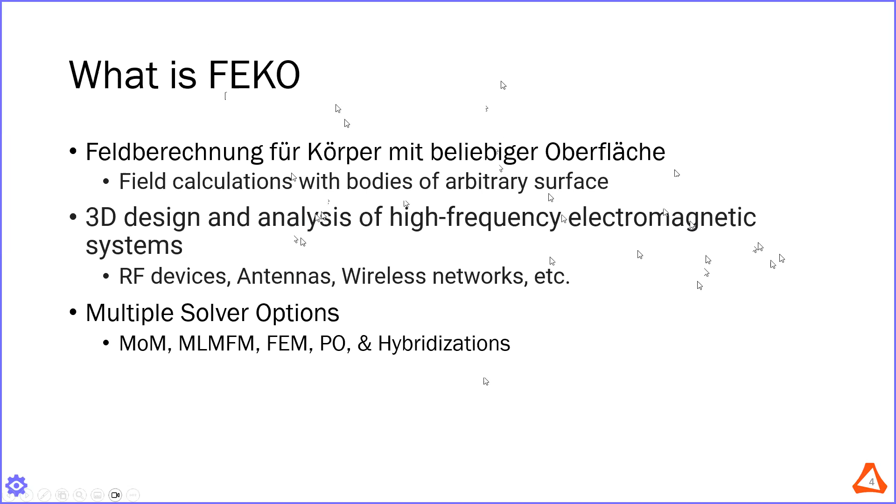So without any further ado, we'll just jump right in. First, we'll look at what the FEKO interface looks like. Just to make sure, can everyone see a new screen that is not my PowerPoint now? Yes, I can see.

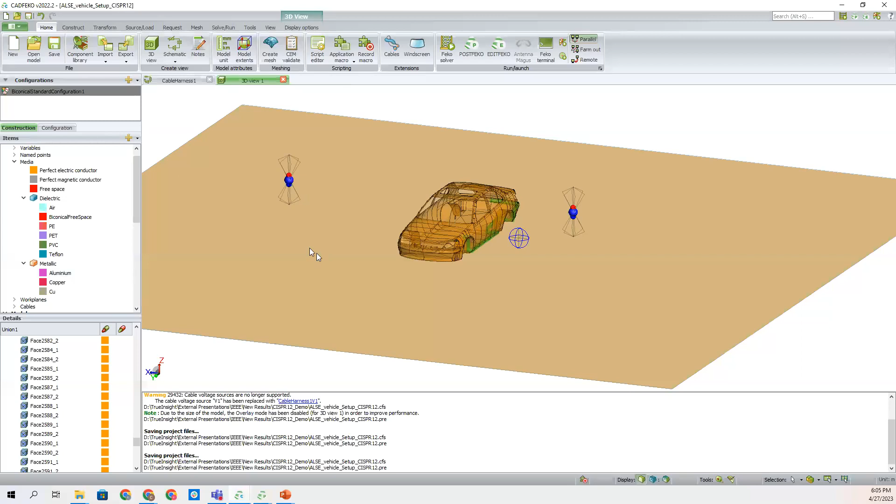Okay, perfect. So before we start even looking at the model we're using, I just wanted to go over a little bit of how FEKO's workflow looks, especially since this might be newer to some people than CISPR. I know some of you have heard of it, some might have even worked with it before, but for those coming in blind, I'll show a little bit of what it looks like.

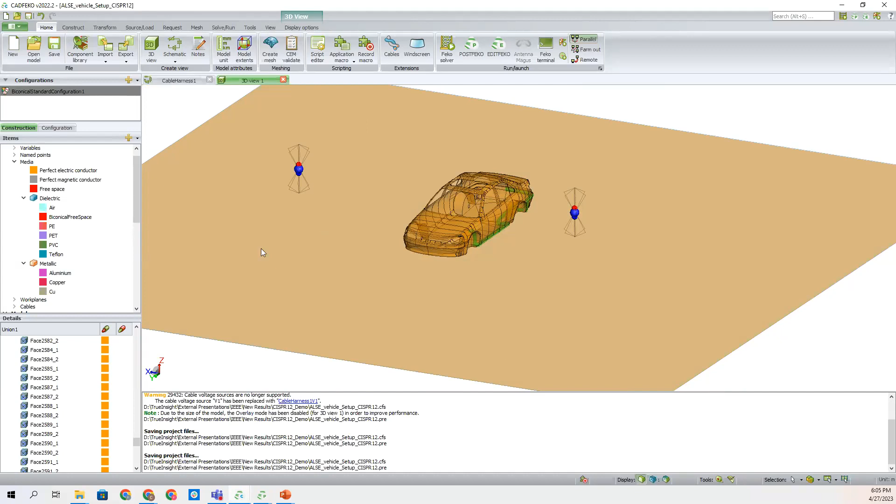So we have our workspace here where, just like any other 3D CAD program, we can zoom in and out and look at our model. That's pretty standard. But then we've got this tab at the top that helps us go through the process of designing something that we want to actually analyze within FEKO.

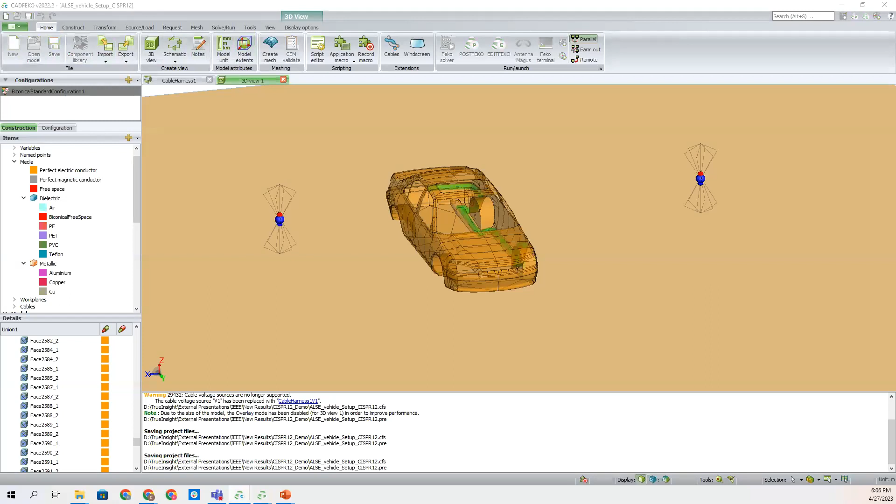So here on the Home tab, we've got some pretty standard options. I won't go over a lot of them, but one cool thing I really like is the ability to import pre-built components. You see there's a pretty extensive list of options, and that includes not only the actual electrical components you're trying to model, like a blade antenna or a biconical antenna, but also some actual structures so you can analyze how they interact in more real-world scenarios.

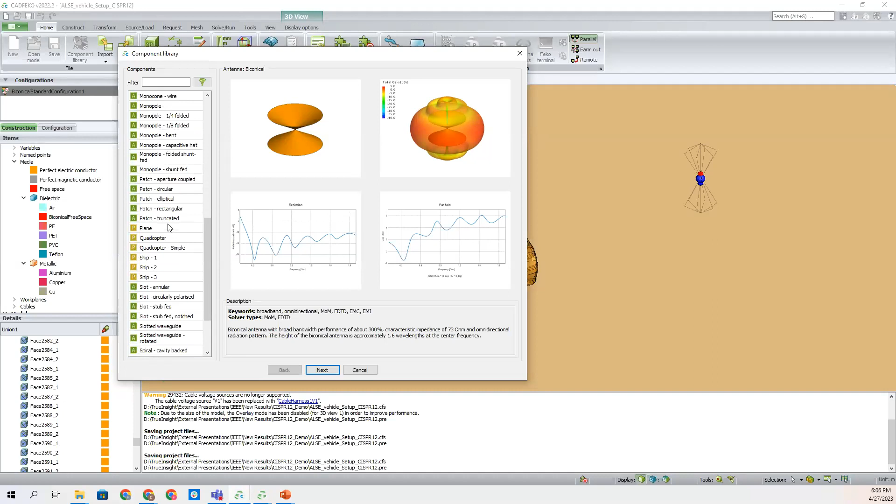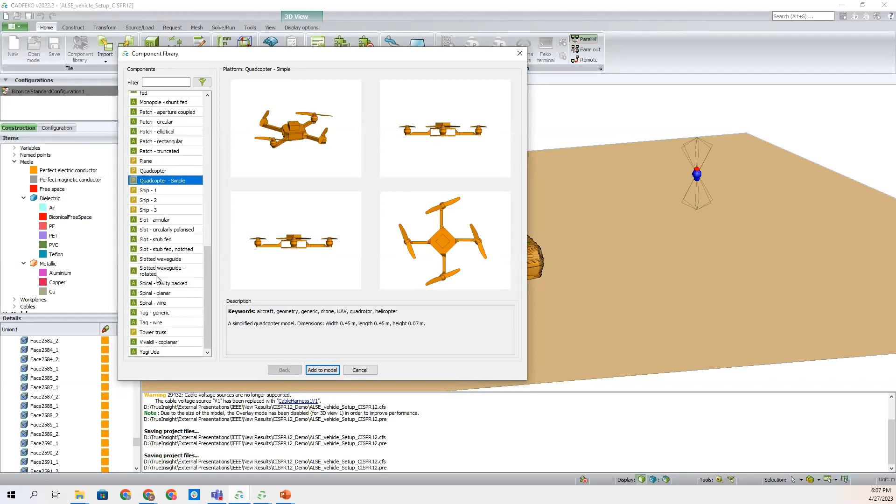So for example, if we wanted to do some antennas on a plane, we could pull in a plane model right here. I won't actually do that because that would mess up the model I currently have open. But there's a lot of options here, a lot of different devices, a couple of different options for vehicles and quadcopters even, and also an actual truss if you wanted to build a tower and plug it in somewhere.

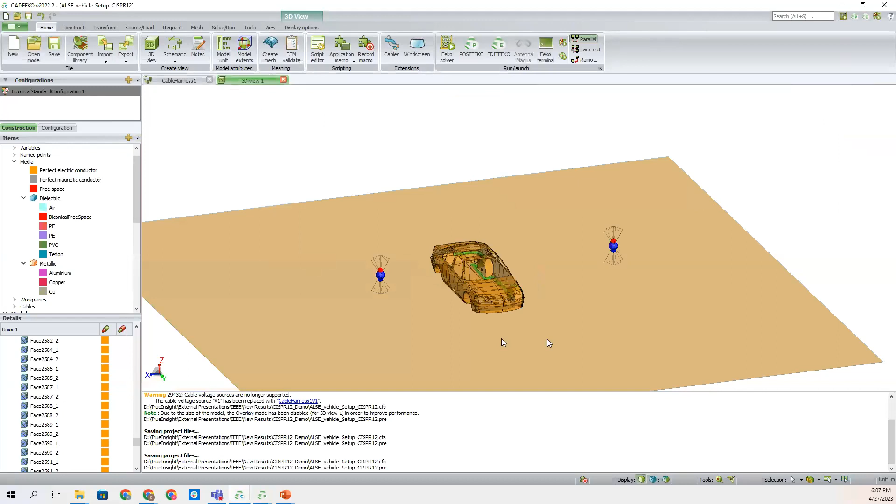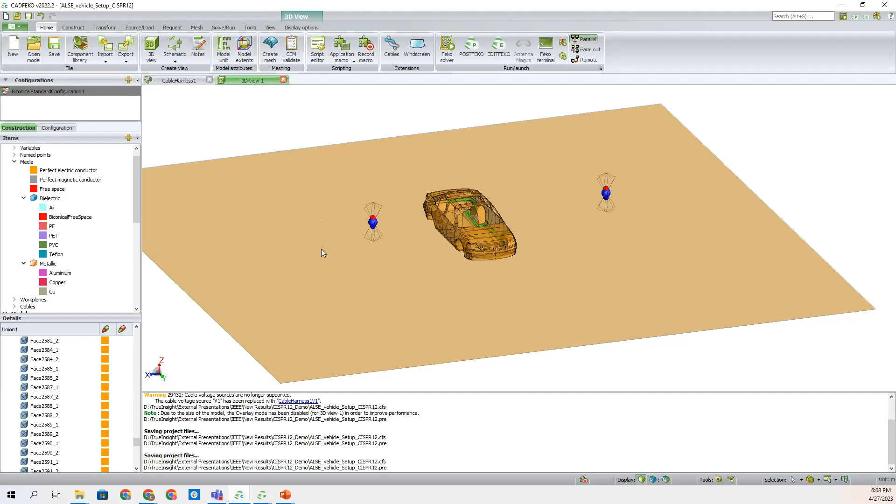This could be beneficial with another tool that I won't be spending any time on, but you can always reach out to us with more questions if you're curious. We have another tool called WinProp that works with FEKO, where you can design antennas and devices within FEKO and then actually test them in larger scale environments, ranging from an office space—say you wanted to optimize your Wi-Fi router position in your office building—all the way up to building a cell phone tower within a city, where you want to optimize the position and orientation of that tower in a specific city, given the data to model that location.

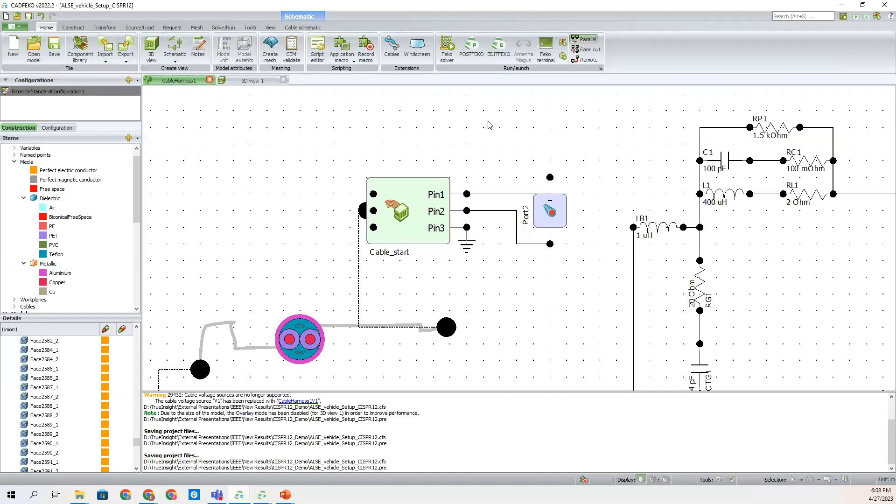So moving on, we don't just have these components built in. You can also import components that you've built in any other CAD software. You can create schematics, which look like this right here. And I'll go over what we're using this for momentarily.

But then through the design process, going back to 3D view, we've got a bunch of options for actually starting to build things within FICO itself—building something custom without importing or using something pre-built. So again, just like a lot of other CAD software, we've got pretty standard shapes. Then we can make unions or subtract, almost like you're about to build something to be 3D printed. You can make lines or helices, any sort of curve, and then sweep a 2D shape along that curve to create a 3D shape.

So the options are pretty limitless depending on whatever you want to come up with to try to build. On top of that, you can actually define various media for the things your elements are to be made out of. It comes with a couple already pre-built—a perfect electric and perfect magnetic conductor. Then if you want to import some custom dielectric, for example, you can just bring this up. You can define it a number of different ways—plug in its loss tangent, relative permittivity, give it a name, mass—highly customizable there.

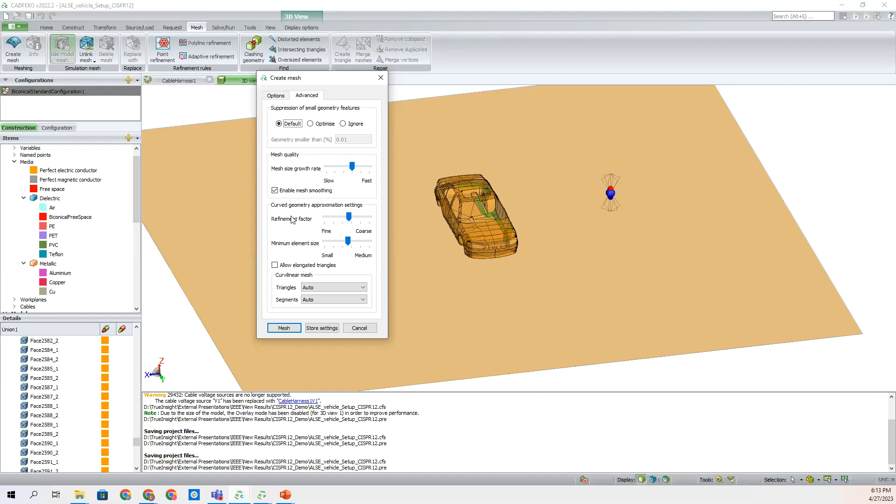Last thing before actually solving is the meshing. So FEKO has a pretty powerful built-in meshing tool already, but there's plenty of options to customize that as much as you want. I typically, for demos, just stick with the standard mesh size, but you can get as complex as you like with defining shapes and how fine or coarse you want that.

So then lastly, we would jump into solving and running something within FEKO. And so again, we've got a couple more options we can do. We can define some symmetry if we're working with maybe a waveguide or something that has electric or magnetic symmetry that will help us speed up the solution.

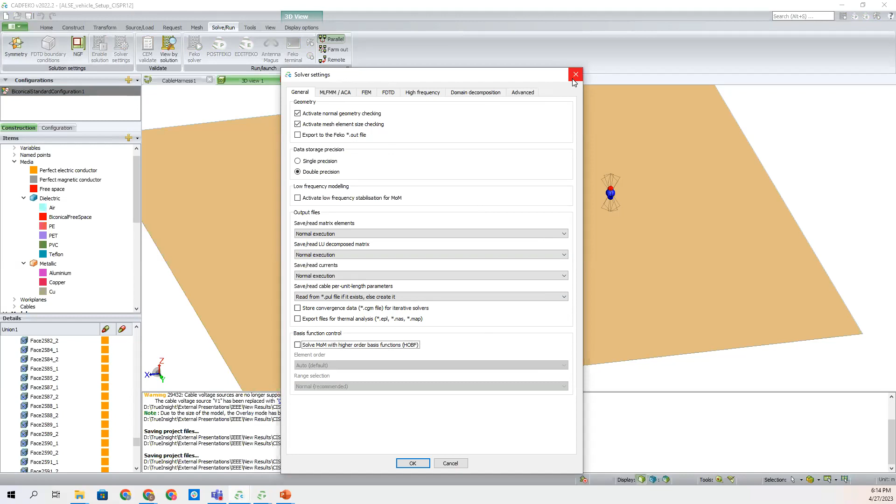We can enable numerical Green's function. We've got a boatload of solver settings that I won't go into, but basically you can tell this program to do whatever you need it to do based on the problem at hand. You can select the solver you want, the resolution, all that good stuff.

So then the last thing to do would actually be to run it and launch our other tool, POSTFEKO. I'll go ahead and show an example of what POSTFEKO looks like as well.

In this case study we're looking at, we're doing CISPR analysis, CISPR 25 and CISPR 12. So what we have here is the realized gain of a biconical antenna that we made for this study.

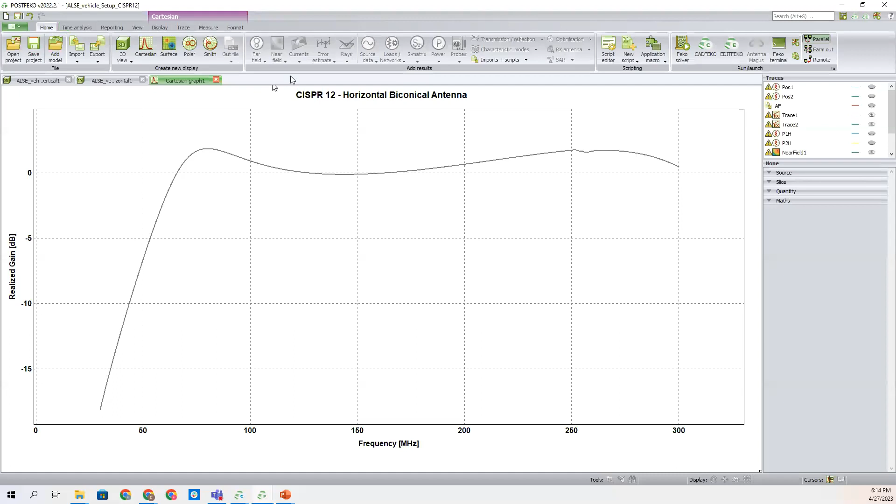And this is - it's very easy to use this program right here. Let me pull this out. So if I just get a new Cartesian graph, I can take that data and I've got plenty of options over here for how I want to view this. So we can convert it to dB.

We can, if we want, enable math - didn't do any of that for this specific project, but say, for whatever reason we have a trace that we want to shift up by 10, it's as easy as typing plus 10 right there, and it shifts the whole thing up. But we will just turn that back off.

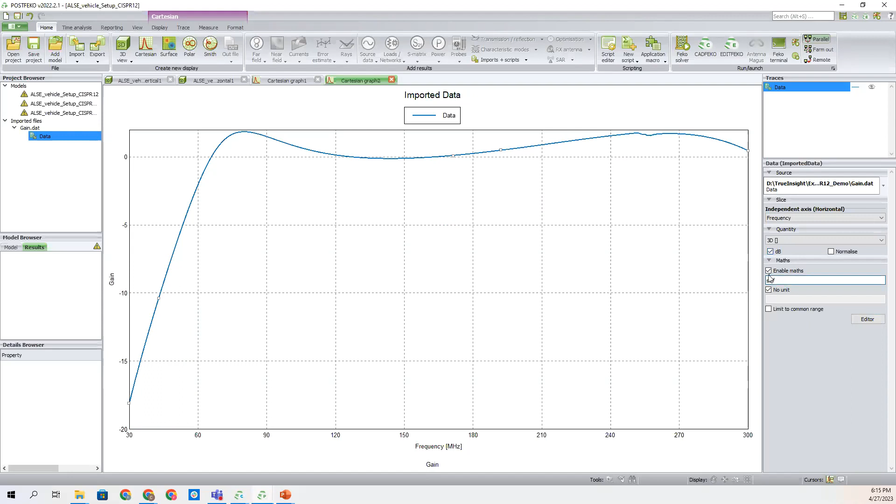So yeah, right off the bat, we can look at our gain data. And let me jump over to the slides for just a moment. I am a little bit out of order, sorry about that. So we've got that same plot right here.

And then we can export this data in a CSV and get our antenna factor. Unfortunately, there's not really a direct way to do this in FEKO, but it's pretty straightforward to export this data and get this information in whatever other data processing tool you might have on hand.

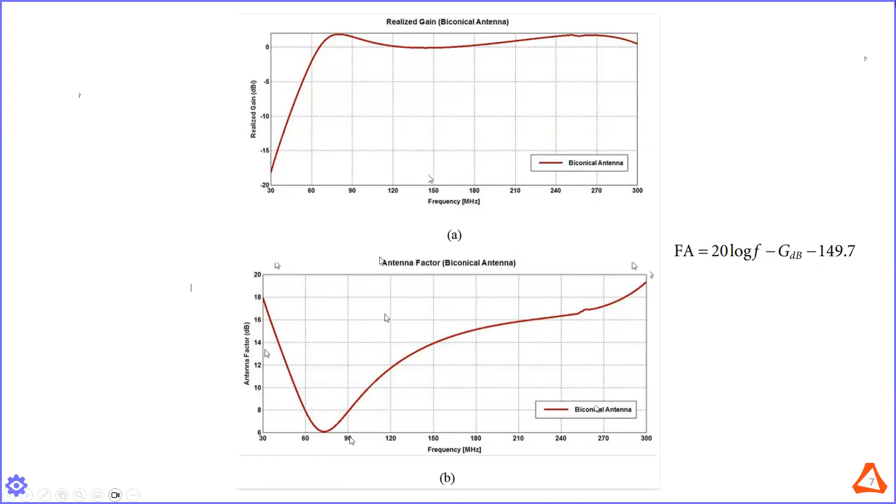The other thing that I should mention is the actual motor that we're using in this study. I should have said this earlier. So for our CISPR 25, we're looking at a 2-speed DC wiper motor. So we actually have that modeled in our schematic right here.

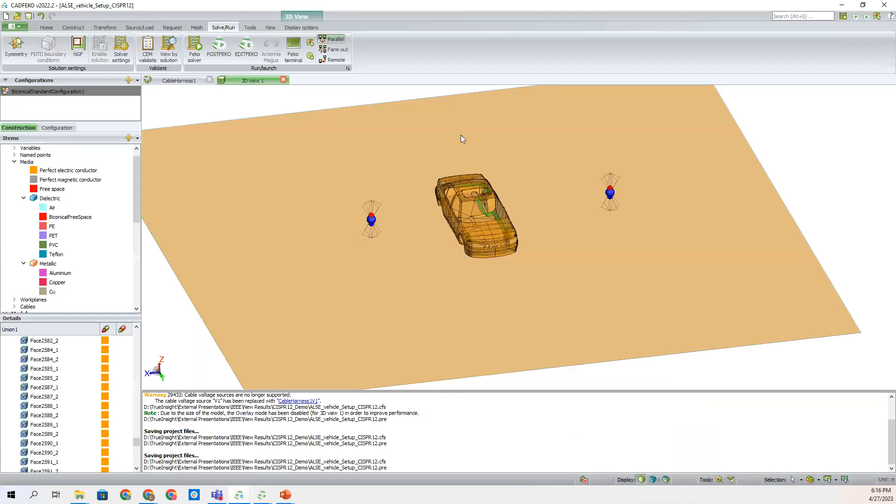That's what this is. And then we've got it connected to a couple other components that we'll circle back to.

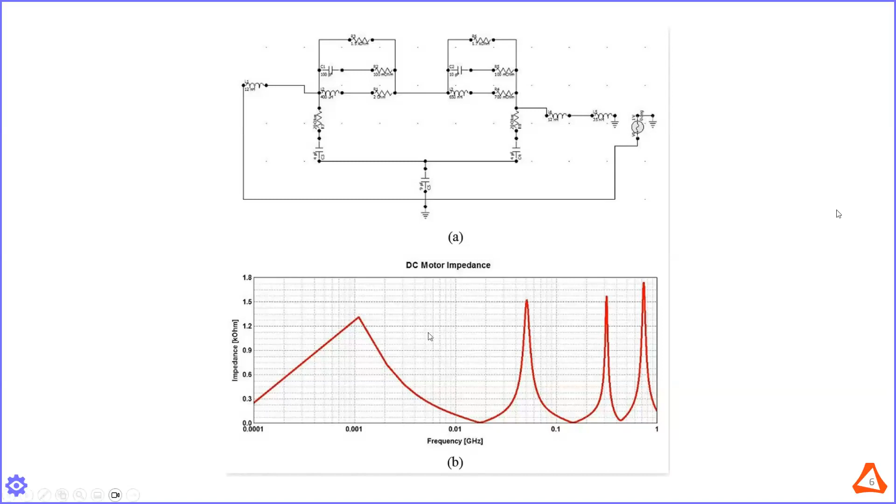We can use FEKO to pull that motor impedance across a range of frequencies and plot it however we see fit. One other thing I don't have pulled up in FEKO: for the higher frequencies from 200 megahertz up to gigahertz, we used a log periodic dipole array antenna and analyzed it the same way we analyzed the biconical antenna.

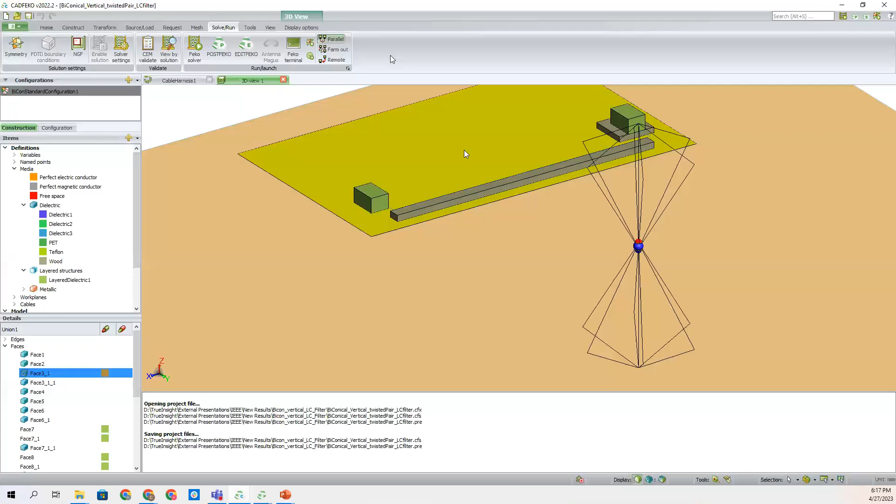So jumping back into FEKO - sorry, I've got about 20 different tabs of FEKO pulled up, so it'll take me a second to navigate to the correct one each time. Again, what we have here is our setup for the radiated emission testing.

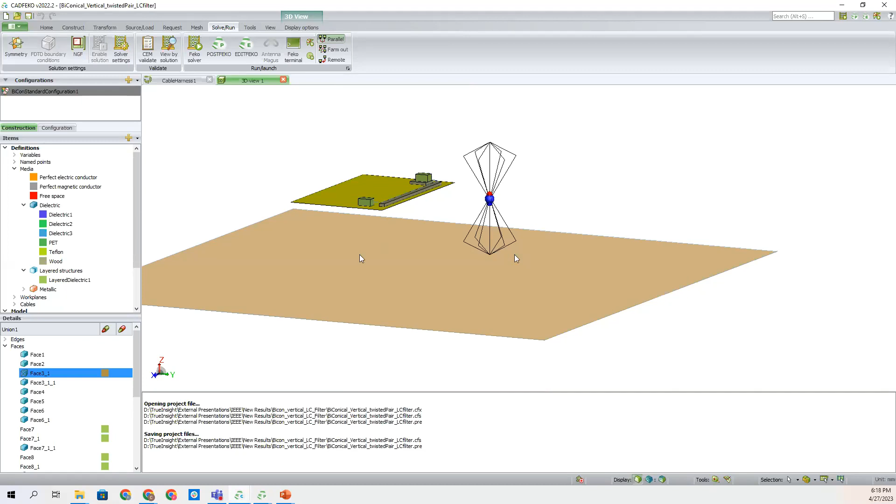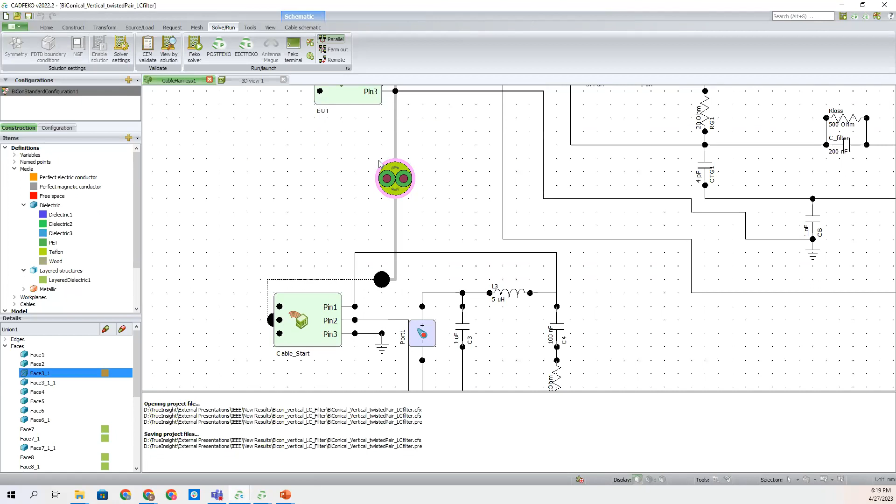This is for 30 megahertz up to 200 megahertz. Here you see we have our vertical biconical antenna next to our DC motor with our line impedance stabilizing network and our actual test harness over here. That's what we're looking at on this table.

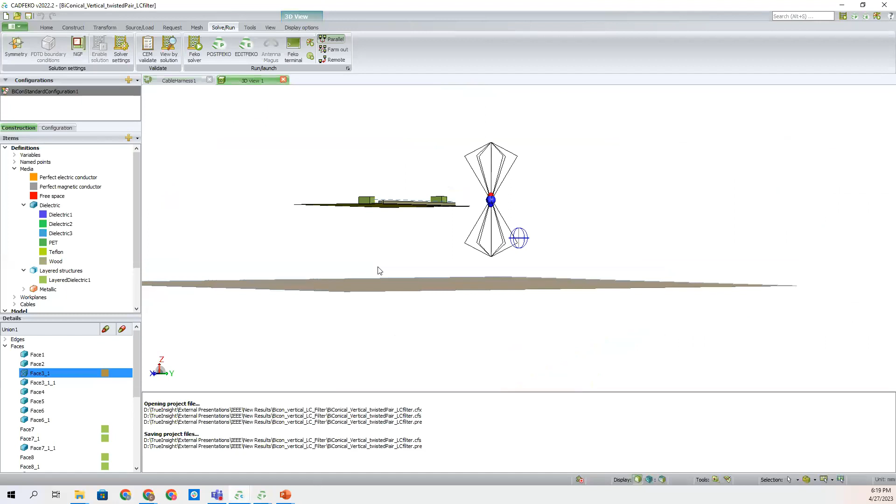And we can see that we've got this face - if I click on that, it will pull up. You can see that we're just resting on a perfect electric conductor. I believe there were supposed to be some legs on this table made out of wood; I might have accidentally deleted those before this presentation. My apologies.

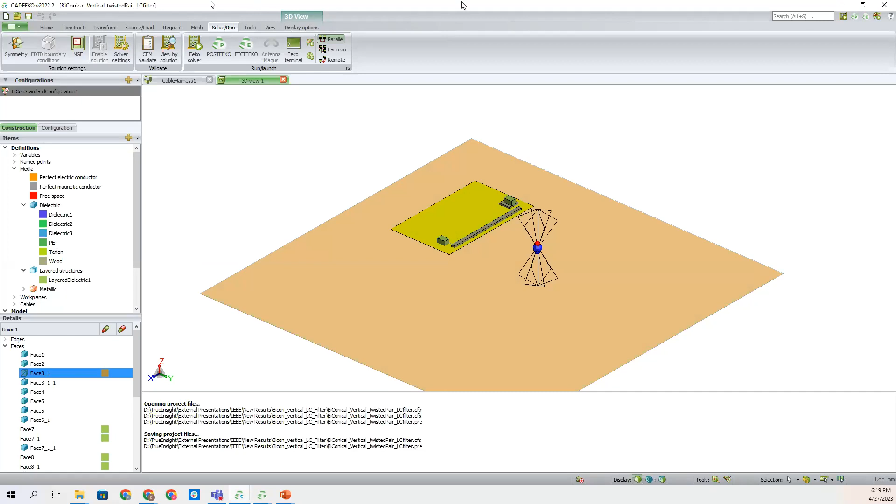With this, we can define a lot of different parameters. We can go into more detail about what kind of cable we're using, and we'll look at some of those in the results from the paper. But just to look at how they actually appear in POSTFEKO, we can come over here.

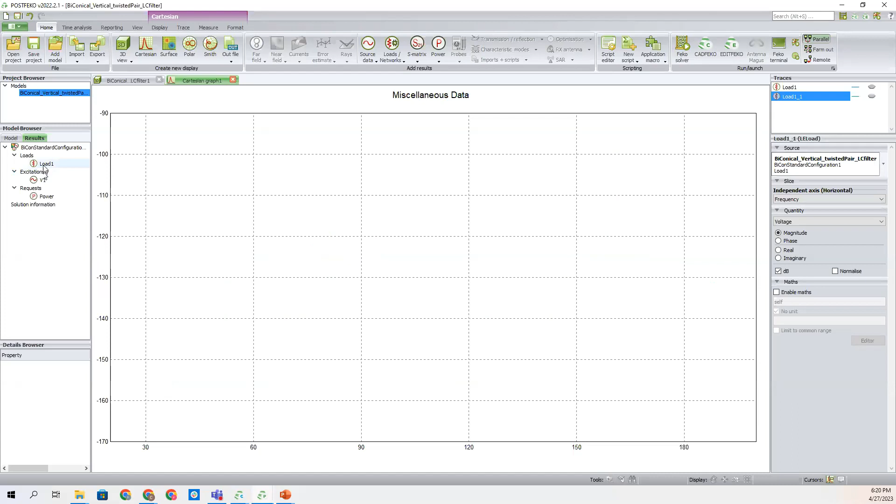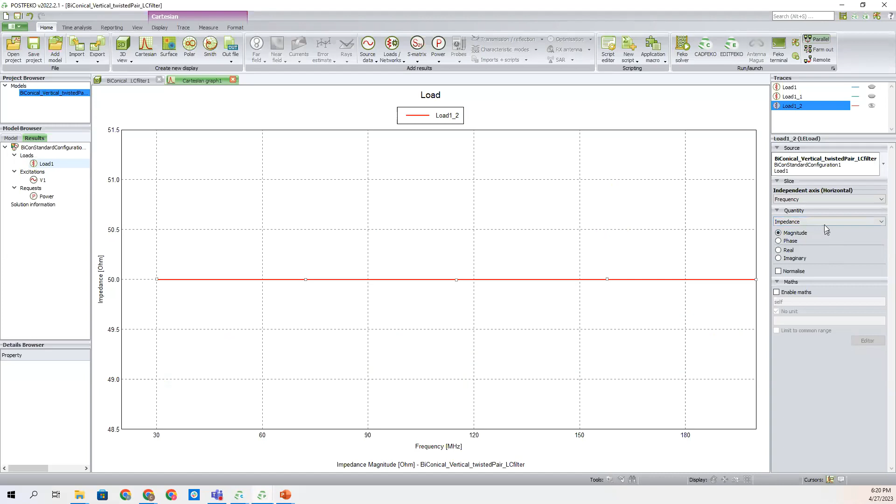What we're looking at here is the load voltage - the electric field received by the biconical antenna. We can hide that and take a look at a couple of different options. Obviously impedance will be pretty boring because this was designed to have a 50 ohm impedance, but we can take a look at some other more exciting information, and look at that in whichever format is necessary at that time.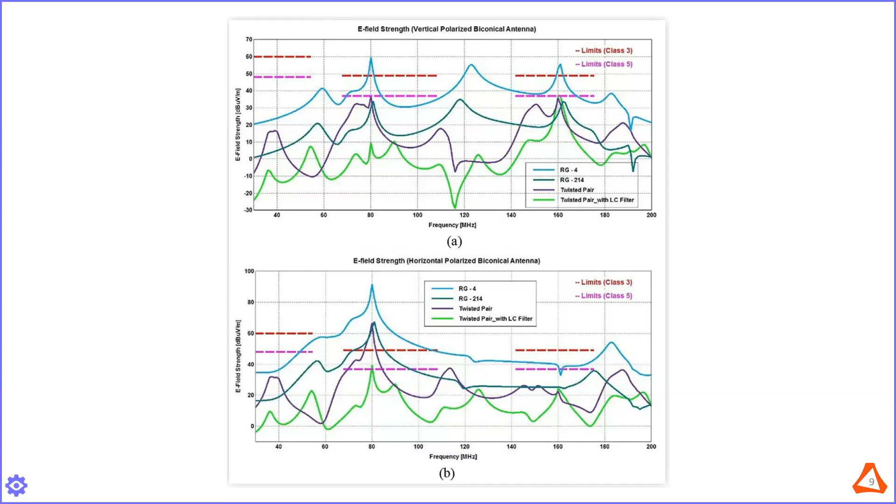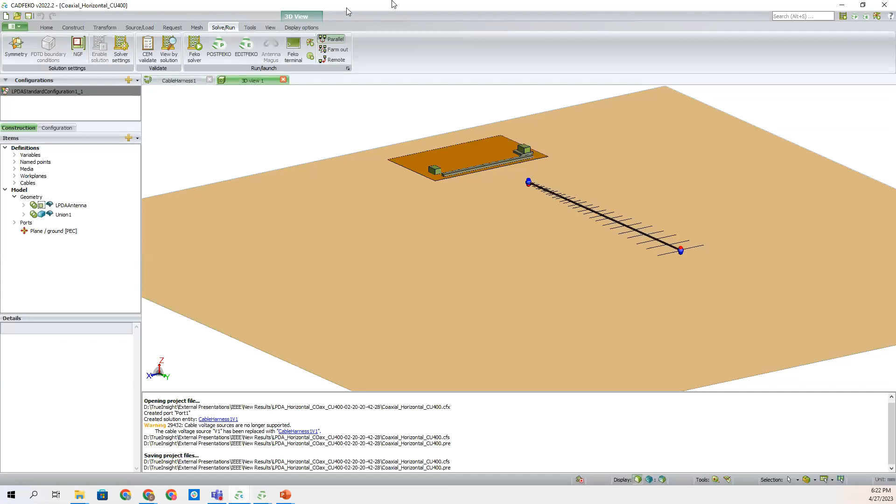All right, so let's pull this up. Sorry, I've got too many CADFEKO pages pulled up. Oh, sorry, that was the wrong thing. Oh sorry, yep, I already had it up right here.

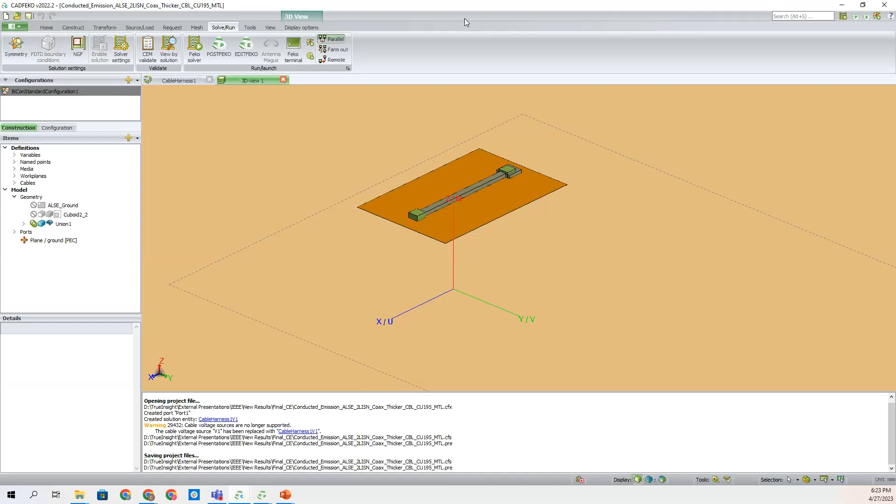All right, here, this is for the conducted emission test setup. So again, just have our cable harness, our motor, and our line impedance stabilizing network. So this is where our DC motor is, and this is where the LISN and the voltage source are.

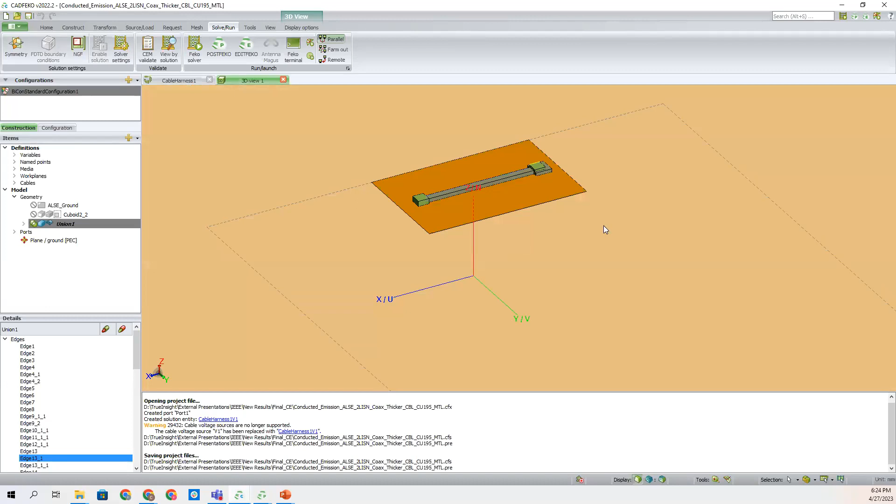I think there were originally some wooden supports underneath this perfect electric conductor test plane. I'm not sure what happened to those. But then again, we can take a look at the conducted emission from that setup right there.

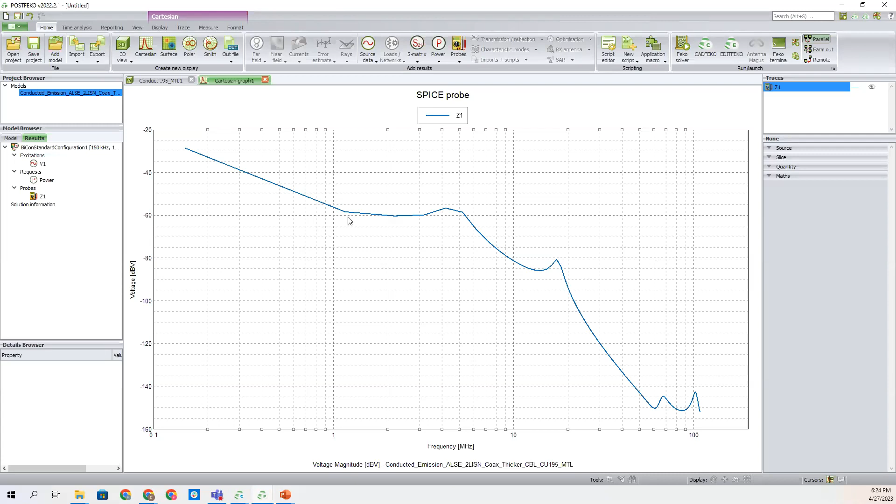One nice thing, you'll see this, I've already done it right here, but I'll show what it looks like from scratch. So if I just get a new plot and plug that probe in, you can see the plot is pretty hard to read right now because it's not logarithmic, but it's pretty easy to swap that over.

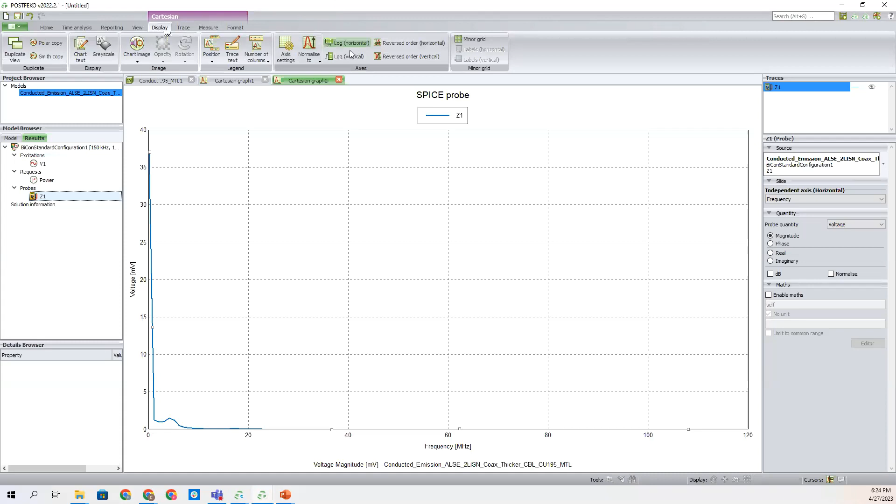So, well, if I can find the button. I say it's easy, and then I can't find the button. There it is. Log horizontal and dB.

And we've got a couple options for customizing our plots in POSTFEKO. We can just as easily click and drag and move things around, or we can pull up our axis settings, turn off the auto, plug in whatever we are interested in. Same for vertical.

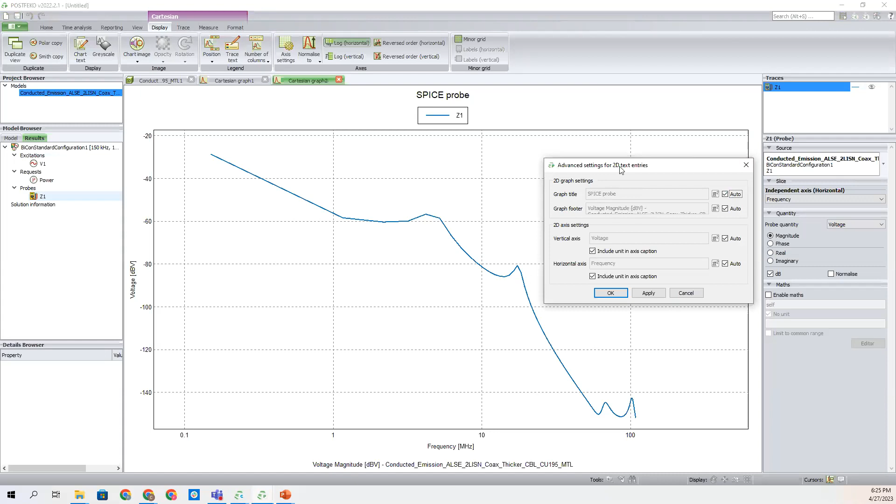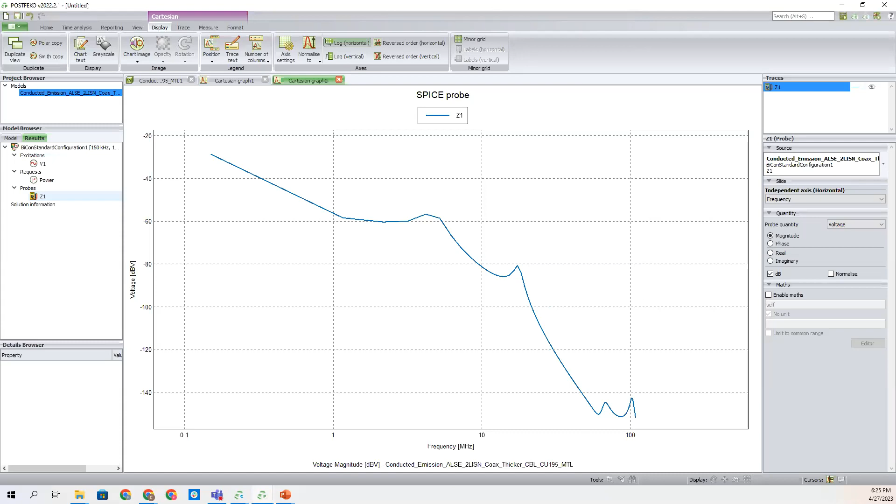And all these, if we go to chart text, we can also customize what our labels are to make this more readable, which is where most of the plots came from in the slides. I just haven't taken the time to do that within POSTFEKO because we have those results handy for us right here. Oh, sorry, let me click back.

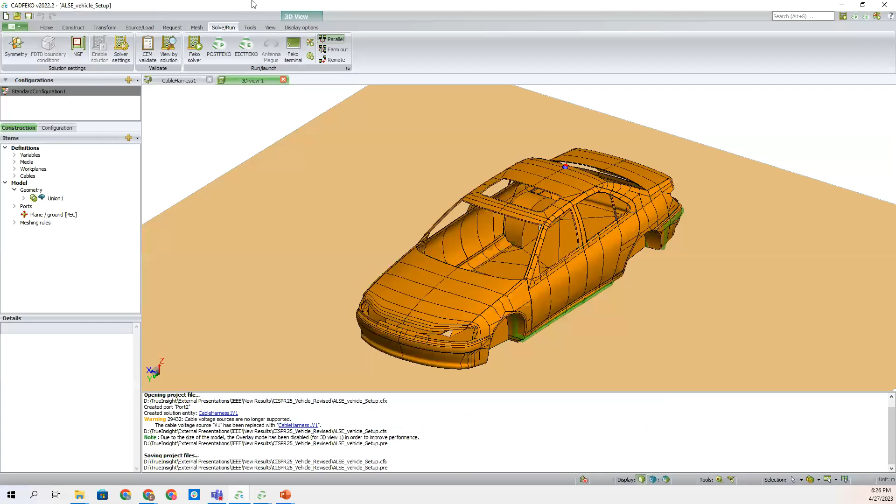So our last setup within CADFEKO, we'll swap back over to the CISPR 25 analysis. So this will be looking at how our model behaves with an actual antenna on top of the car with a DC wiper motor, 2-speed DC motor placed at the back.

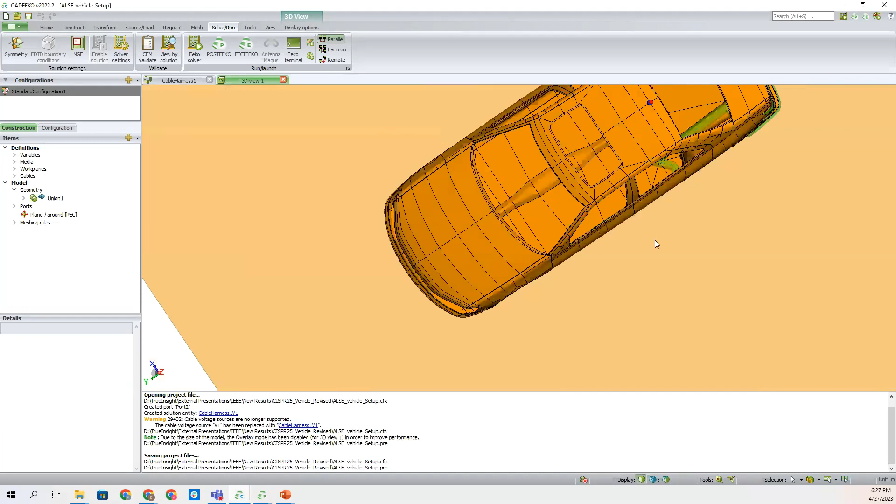So again, this is probably the more complex of the, at least from a modeling perspective, of what we've looked at so far. One thing you don't see in this model is, sorry, I keep left clicking or right clicking instead of left clicking.

We've got, we actually tested with different placements of this monopole antenna on top of the car. We had it right here where you see it, and then also right here at this next intersection.

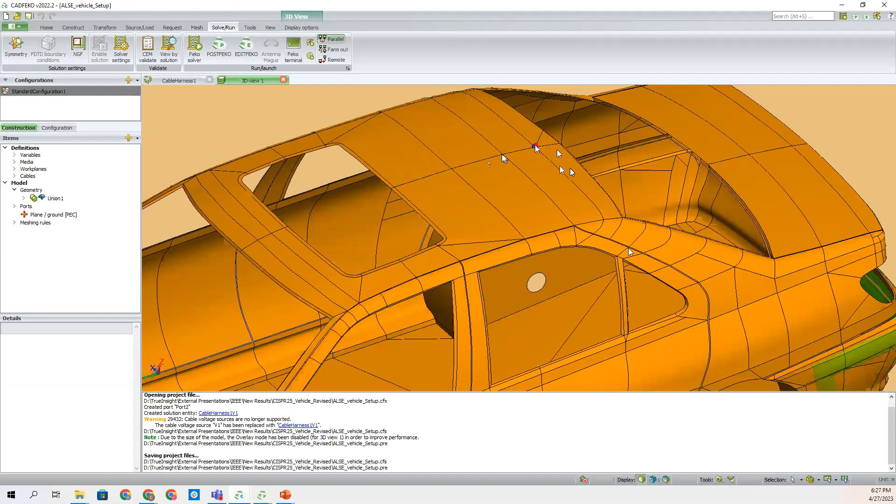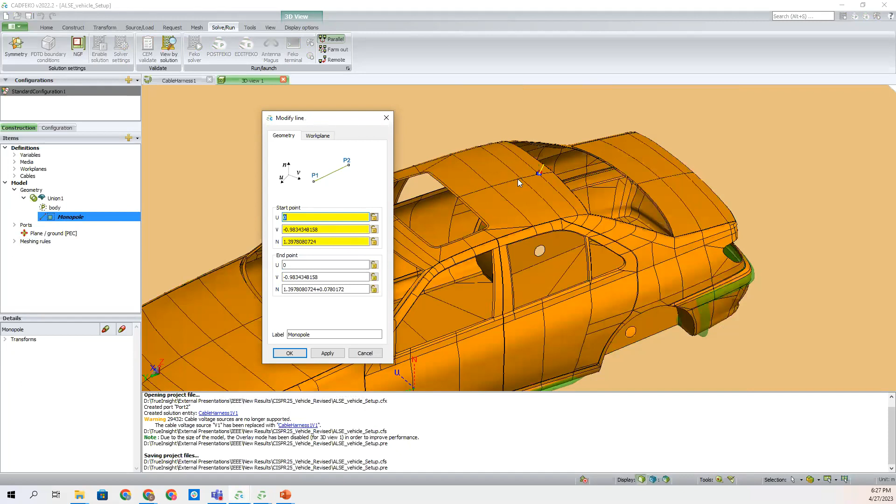So we could, I don't think it will let me move anything right now because it's all unioned. But we could pull this up right here and we would know exactly where we wanted to move it. We could plug in its new coordinates and actually move that to its new location for comparison's sake.

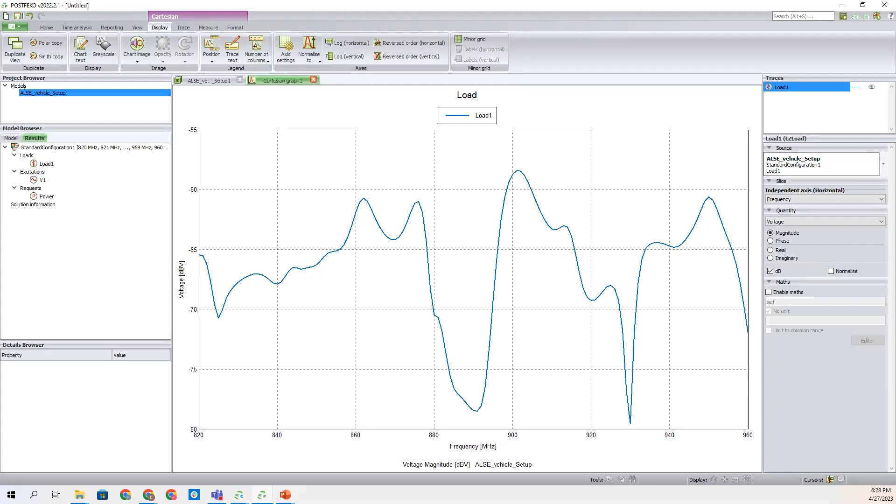So that's exactly, well, for in POSTFEKO, the results we're looking at are actually just for the first placement, the one that you actually see. But then we also have some results handy for looking at that with the other placement that I pointed out.

So again, you could see that interference between the DC motor on board and the receiving antenna. So this could be helpful for figuring out, in this 820 to 960 megahertz range, making sure that the quality of the received antenna signal is what we want it to be, and that we're not going to mess it up with whatever devices we might have.

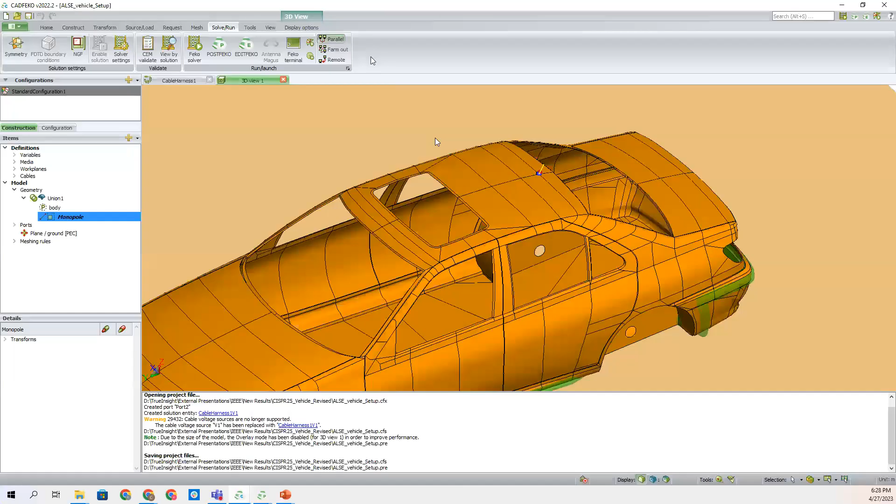And one of the things that's worth pointing out on that model is, again, the cable harness setup. So we've got our DC motor and then the connections in the car. So we can click and drag around here.

So one pretty cool feature about this cable harness setup is you'll probably see this gray line right here. And if you're anything like me, you probably are looking at that and thought, what is that for? At least that's what I thought when I very first looked at this schematic.

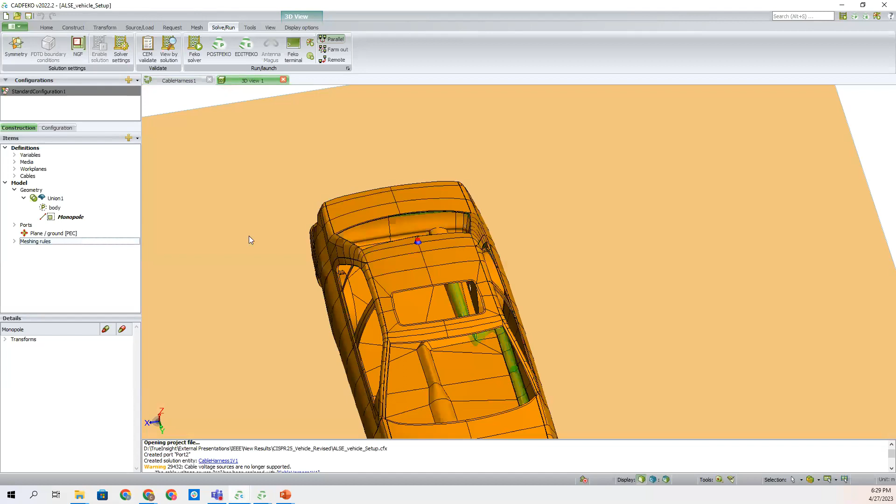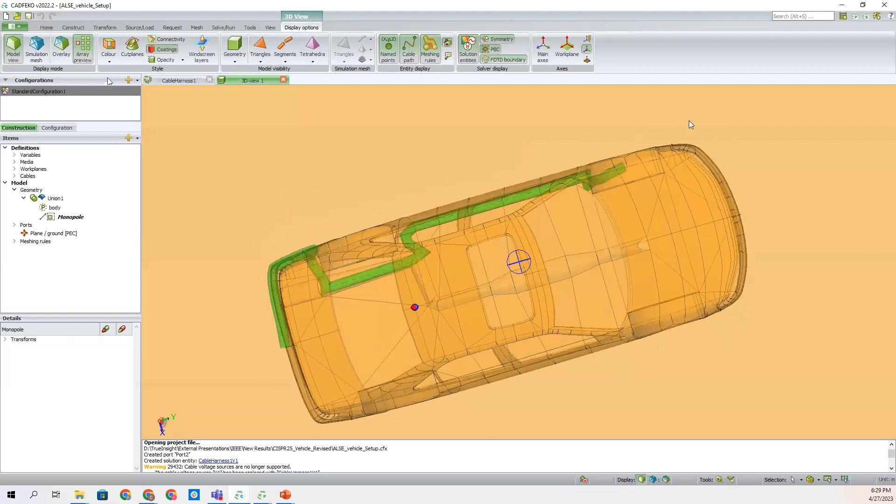But then if we take this model and let me turn the opacity. If we take that and position it just so, oops, sorry, I keep trying to get it there we go. That shape starts to look pretty familiar.

So I just thought that's not really anything all that exciting, but I thought that was a pretty neat little feature. So then let me put that back over there.

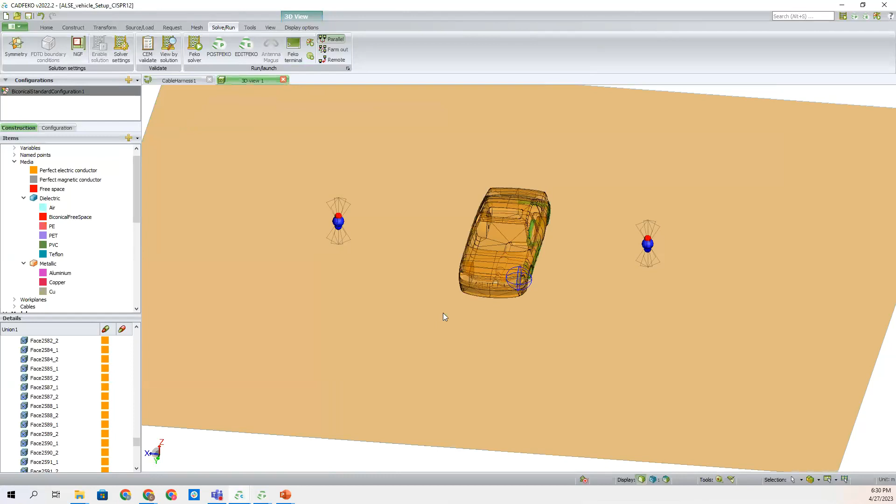Okay, and so lastly, we can take a look at our absorber lined shielded enclosure setup. So that was pretty similar to what we actually just looked at in the last model.

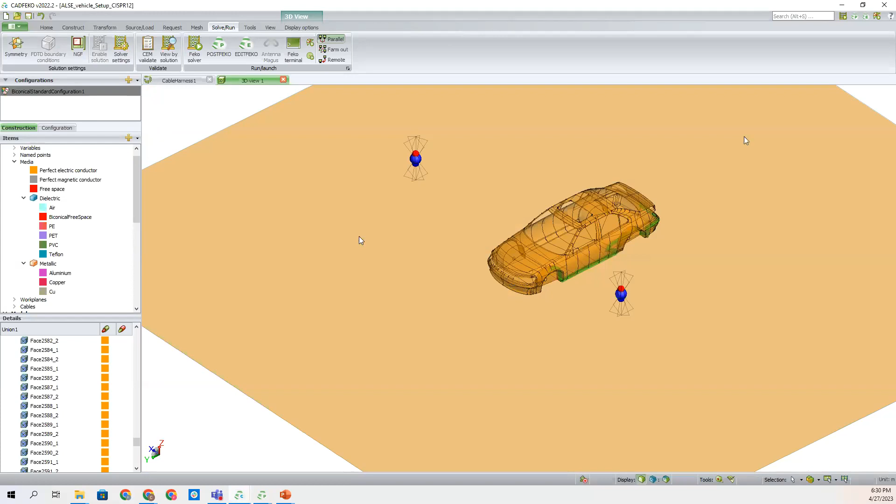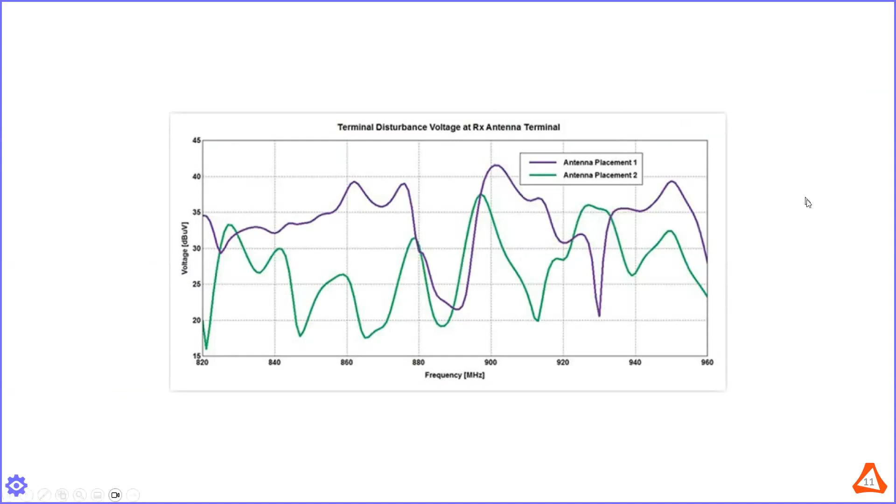But now what we have here are some other receiving antennas, and we can measure the radiated disturbances seen by these biconical antennas. So again, we've got our setup with our motor and our ALSE, and we can take a look at the results that FEKO can provide us for our CISPR 12 analysis.

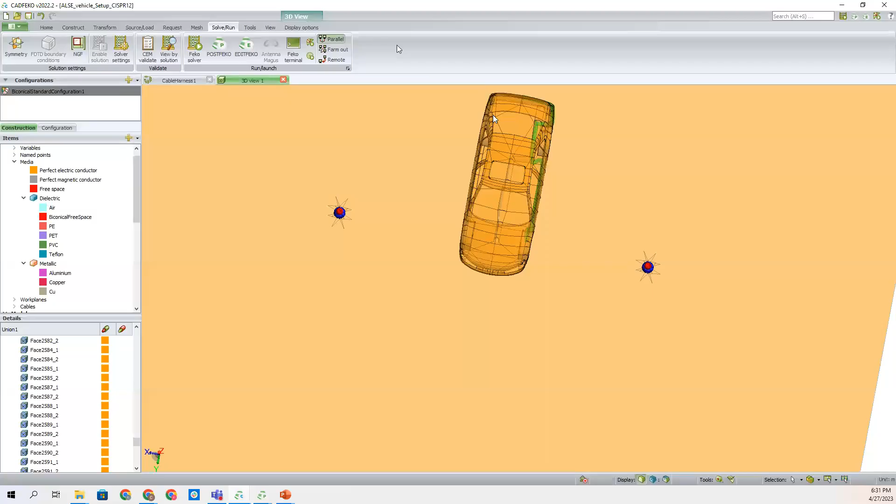And so again, we could use this to help us decide what kind of next steps are necessary in the design and analysis phase.

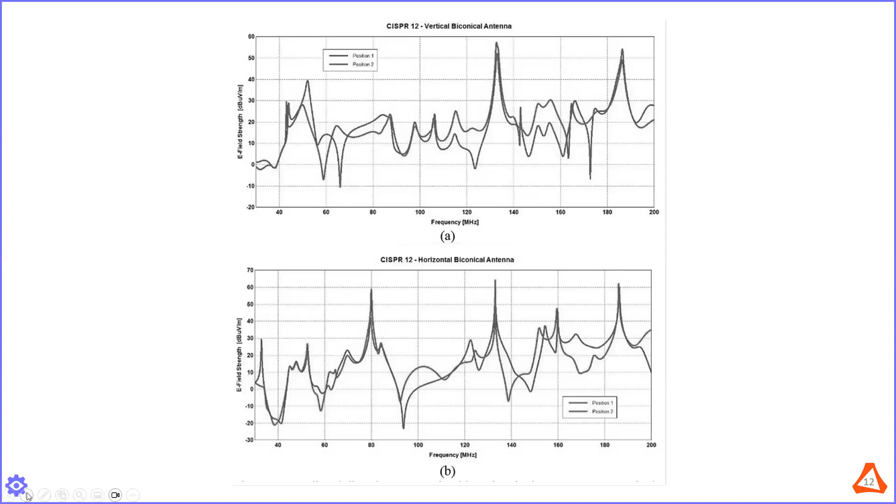So I know that went by pretty fast. Again, there's a great deal of the EMC end that is a little bit harder for me to elaborate on. But as far as the FICO and POSTFEKO, CADFEKO, and a lot of FEKO interfaces, I can start accepting questions on that or any specific questions on the study. I think CJ is still in here to help out with that. So with that being said, I'll open up the floor.

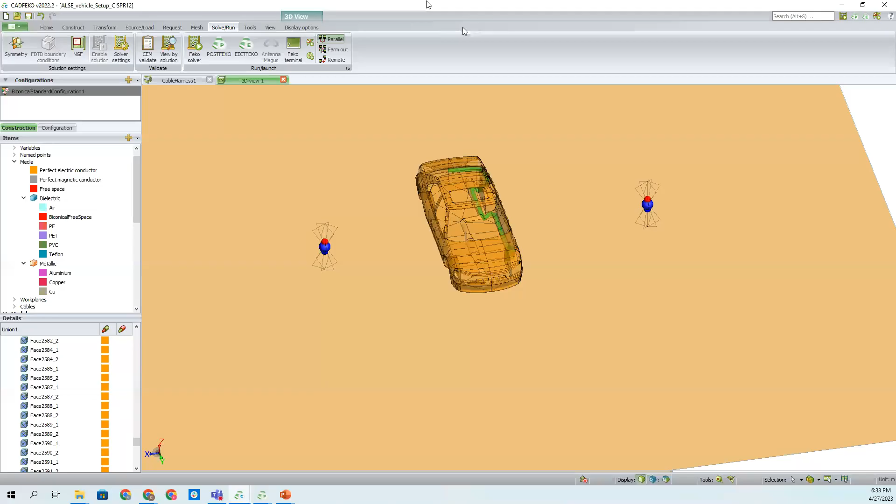That is, let me pull up, I have one of the models open with the mesh showing. Let's see. There we go.

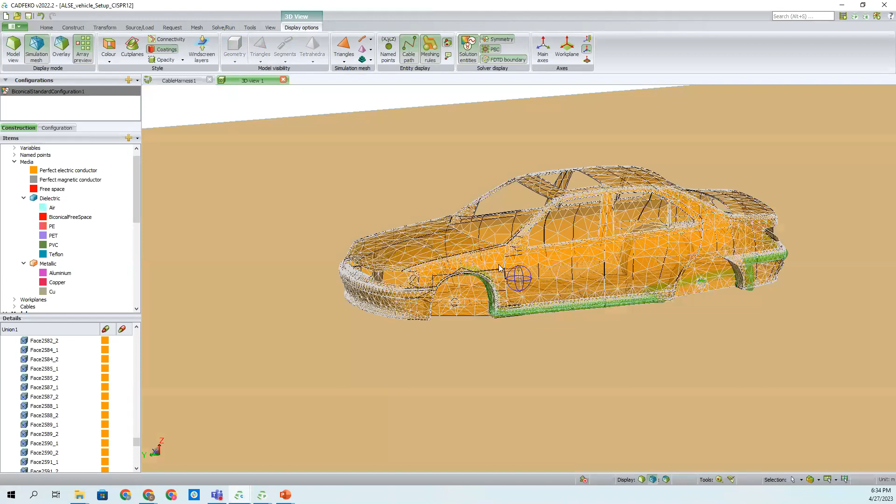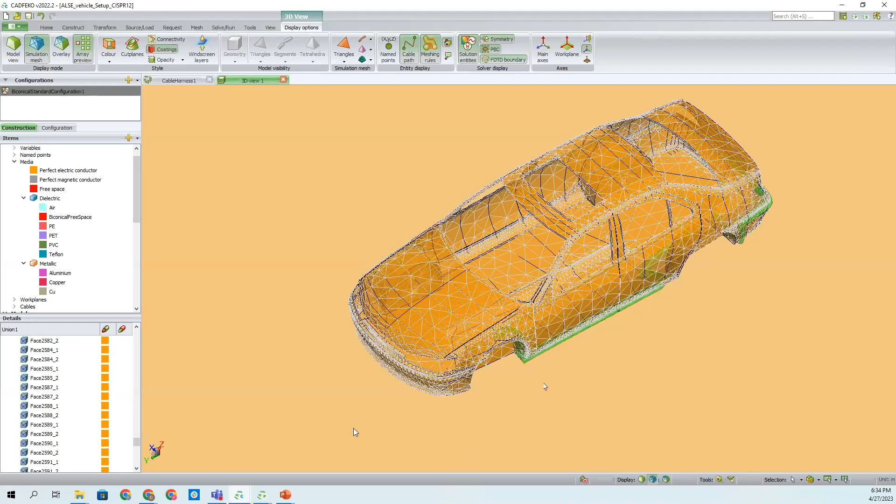So yeah, you can define different coarseness and fineness based on the shapes of the model. So one of the nice things that the solver automatically does, especially for these larger models, is for some of these larger, more uniform surfaces, we get larger triangles for the simulation breakdown, and it will automatically get finer in more complex areas.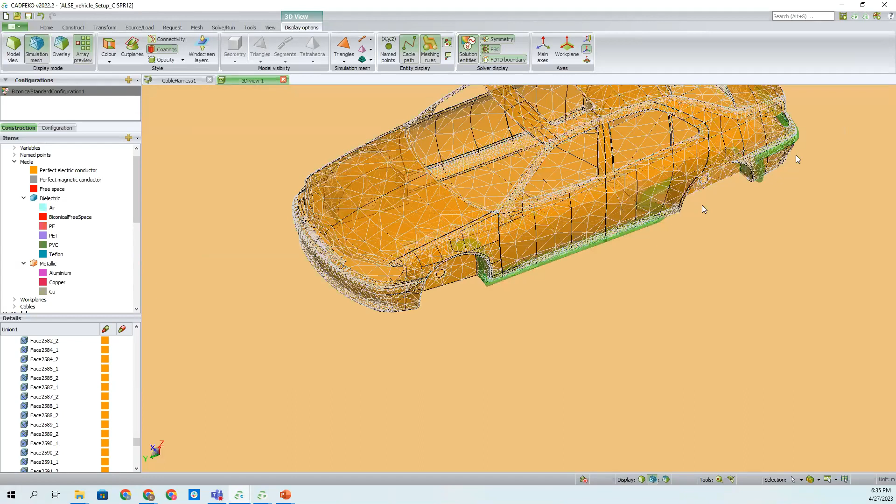So it's kind of half and half, here, I'll zoom in. You can see it gets finer for these curved and more intricate surfaces. So it kind of bridges that gap for you, maintaining computational speed as well as maintaining fidelity of the model.

Let me throw in a question. So if you had a wireframe model from your OEM, could you import that into here? Is that something you can do with this?

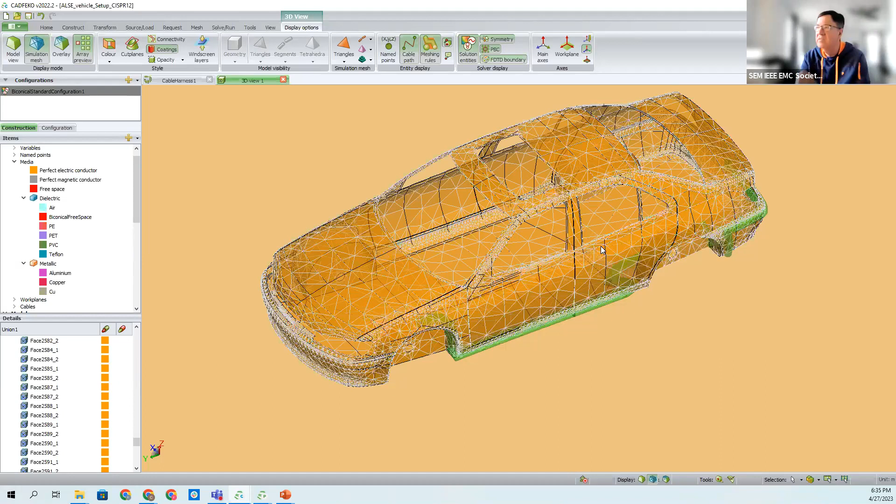So yeah, there's a lot that you can import into CADFEKO. I guess I'm a little unfamiliar with what file type that would be. But maybe if I can make a comment, Fletcher.

Okay CJ, yeah, go ahead. So a couple of things. First, I think Ryan's question is about bringing a very complex model into FEKO with various entities, hundreds and millions of entities. We do have an import, as Fletcher is pointing out, of any format you can think of - CATIA, STEP, IGES, and those kind of things we can bring in. But of course, CADFEKO itself, though it can do some kind of simplification, isn't suited just for the simplification purpose. We do have an Altair portfolio, other tools called HyperMesh and others, widely used in automotive industry to de-feature - I think that's what we call it - to take out all the small parts. So in this case, if you just want a body in white, no seats, nothing inside, we can easily clean that up and then bring it into FEKO for analysis.

Scott, when you said the wire model, I don't know how many people use wire models nowadays. It used to be a very old model, similar to this one that they may have already.

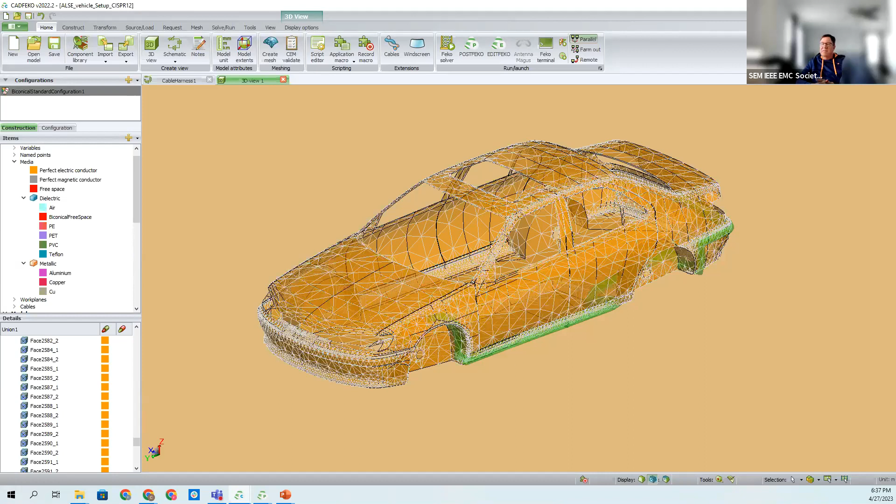There's another question in the chat if you want to scroll to the next one. Have you ever performed any empirical measurements?

I'll let CJ touch on this, but this was all done in sim. Unfortunately, this specific analysis isn't compared against any empirical data. But I don't know if you've got anything else to add to that specific point, CJ.

Yes, you're right, Fletcher. I think we have not measured it. This is, of course, to show the process, how you can do it. It's possible that when we did that, maybe we didn't put in the right parameters, because we were just trying to show the process. But I think if you put the right parameters, it'll probably work very well and should compare well with measurements. That's something we can work on with any of you who may be interested in validating the simulations with the measurements, or vice versa. Thank you.

And there's another one from Jerry. Jerry asked about the motor noise source - a brush motor is a coarse broadband noise source. How did you get the passive elements, RLC, and the sparking noise source to become a frequency swept sinusoid?

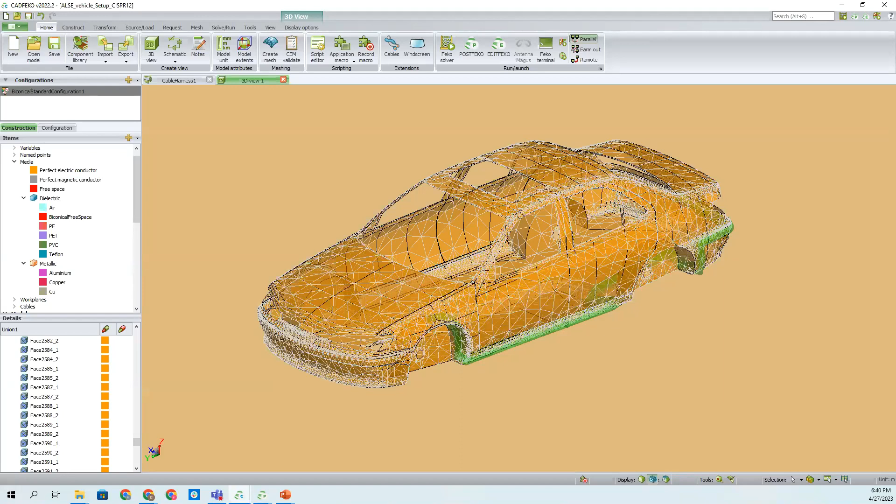Right, let me pull that up. And again, CJ, I'll let you talk about this.

Jerry, nice seeing you here. Hopefully we'll see you in Grand Rapids at EMC. You're right - I think what we took here is a model that's available in the literature. In the paper we published, there's a reference to this motor where they used it for their own simulations, so we picked it from there. The point is that if we have a more realistic motor model and excitation, we can do that as well - our knowledge of this is a bit limited, so we picked whatever is available in the literature.

Yeah, that's fair enough. Very good, thank you. I think this is a good demonstration that when you're doing any of this modeling, you need to be semi-aware of what you expect to occur. What got my attention was, if I caught it correctly, you indicated a twisted pair would give better performance than RG214 around 500-600 megahertz. That tells me the model probably wasn't considering the common mode currents, which will dominate at those higher frequencies, and a twisted pair absolutely is not going to perform better than RG214 under those circumstances. But it's as good as the model, and I understand it demonstrates how to use the tool.